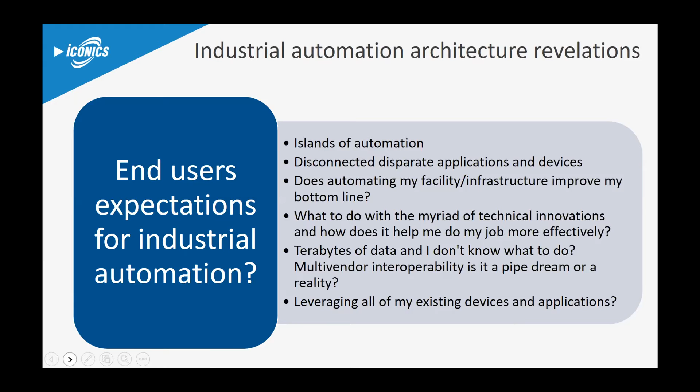As you think about this, beyond digital transformation, I think about manufacturing overall. We talk about Industry 4.0, and it's really important to understand where did Industry 4.0 come from. The first revolution was really the Industrial Revolution, which was focused on all the mechanical aspects. The second stage was trying to do a lot more automated things, thinking about assembly lines.

The third revolution was my favorite - the beginning parts of this is when we started thinking about programmable logic controllers, doing a level of automation in discrete and process through the ability to have an industrialized computer known as the PLC. The fourth revolution, which is the most important and has the largest momentum, is essentially what's going on with Industry 4.0, as well as all the regional equivalents of that.

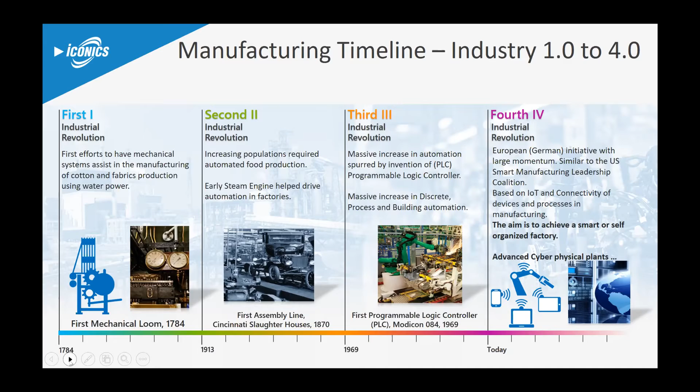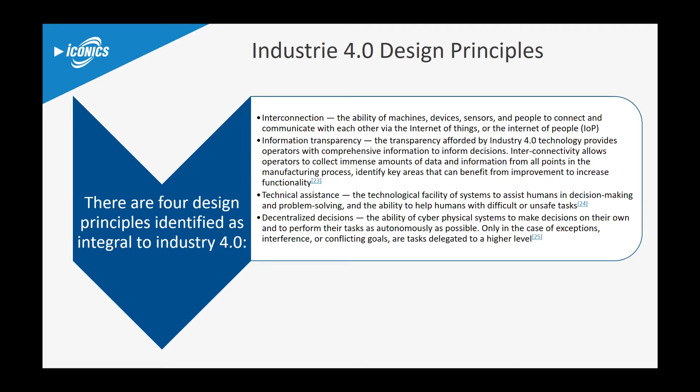The aim of Industry 4.0 and the whole industrial revolution is really to achieve a completely smart factory, a self-organized factory. If I look at Industry 4.0 and all the regional equivalents, there's basically 4 design principles that make up Industry 4.0: interconnectivity, information transparency, the ability to have technical assistance helping humans in decision-making and problem-solving processes, and at the same time decentralized decisions, allowing separate cyber-physical systems to make decisions on their own, achieving a significant level of automation as we approach full IT-OT convergence.

In the factories we've seen over the years, there's always been a wall between IT and OT. But now, IT really needs to get data from OT. And what we're seeing is the whole concept of focusing on what's known as IT to OT convergence - the ability to take data from OT and translate that data into useful information for the IT world.

There's a lot of different things that go on in the OT world - from a connection standpoint, gathering the necessary data from all the different devices and applications, and then being able to take that data, analyze it, and use all these great products out there to convert that data into what IT people understand to make useful decisions. The same is true that IT, after it makes those decisions, can actually push data back down into the OT world.

I'm pleased to have joined ICONICS to really focus on a lot of the things they've been doing, and how ICONICS has really been focused on delivering on this whole concept of the Internet of Things. They think about managing our devices - how do they manage those devices and how do they interact with the cloud? How do they leverage all that data, make it useful information, and ultimately get insights on that data to make better decisions and really realize the new business value that all this connectivity and data can give us.

One significant example I'm excited about is work we've done with a major oil corporation—unfortunately I can't say their name—where they leveraged all these different components using OPC UA technology. They were able to take ICONICS' respective IoT and HMI products, grab and consume this data, and push it up to Azure. This is a significant part of enabling them to have a complete automated process control system.

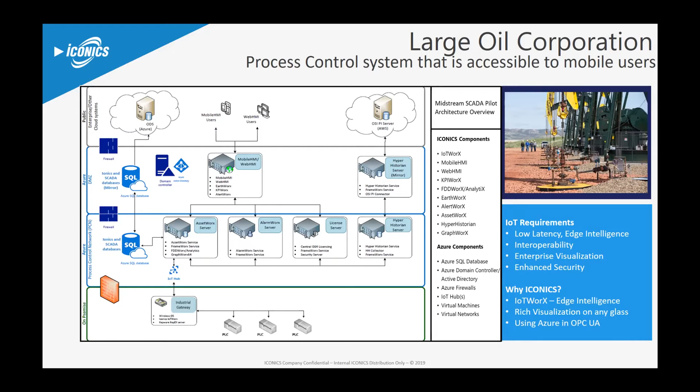Industrial automation spans a number of different industries. Another example is work we've done with Singapore, related to what we call the smart nation. They've started thinking about streamlining operations and achieving energy savings through central monitoring of all their assets with real-time visibility—again leveraging all these IoT components and taking advantage of digital transformation.

With that, I'd like to turn it over to Jim, who's going to go through a customer success story and provide a good example of how we've been using and deploying digital transformation with both Iconics and Mitsubishi-based products.

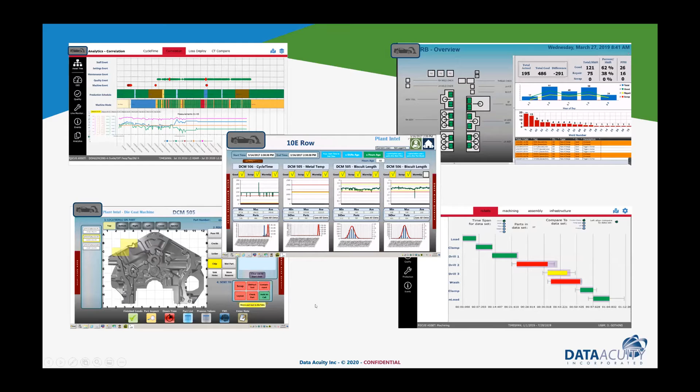These examples are all in the automotive industry, but we've applied the same data structure and data analytics across many different industries. So if you're not in automotive, this certainly applies across many different industries.

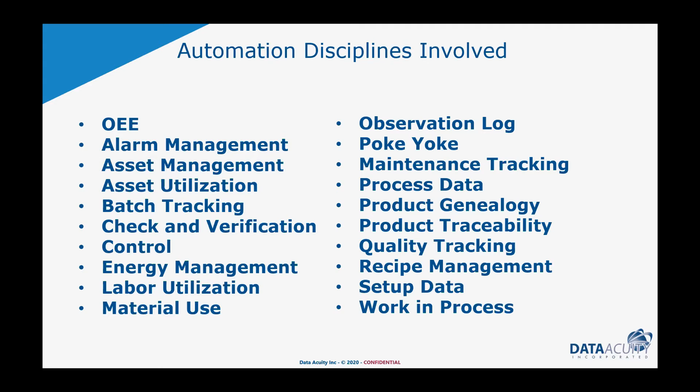The buzzwords manufacturing execution systems and the acronym MES tend to cover a lot of different automation disciplines. This includes OEE, or overall equipment effectiveness, alarm management, asset management, recipe management, product tracking, product genealogy, maintenance tracking, work in process, and labor utilization. All of this eventually gets pulled into these kinds of projects where we're analyzing data and looking for efficiency.

For today, we're really going to focus on just a handful of those automation disciplines. We're going to start with how we applied OEE, overall equipment effectiveness. Just about every project starts with OEE, and we come back to it quite often, because that's the tool set, the measurement that allows us to focus our resources where their greatest need is.

We're going to talk a little bit about taking data from things like control systems, material use systems, quality tracking systems, and maintenance tracking systems, and not just leaving it as data to be visualized, but bringing it all the way to things like predictive availability, predictive maintenance, predictive quality, predictive material handling, and predictive performance by taking data analytics and bringing it up to predictive awareness. We'll talk about how we did that in some of these projects.

Again, we'll start with OEE, overall equipment effectiveness. The concept and principles of how to apply OEE have been around for a long time. Most of you have probably looked at OEE at some depth. So OEE is availability, performance, and quality as a measurement of how efficient a given piece of equipment is.

Availability is defined as the operating time versus the downtime, and operating time happens to be not a 24-hour clock, but in fact the scheduled operating time. Performance is the speed or quantity of product versus the design rate of a piece of equipment. Again, design rate is a little subject to interpretation, and we'll talk about that in just a second.

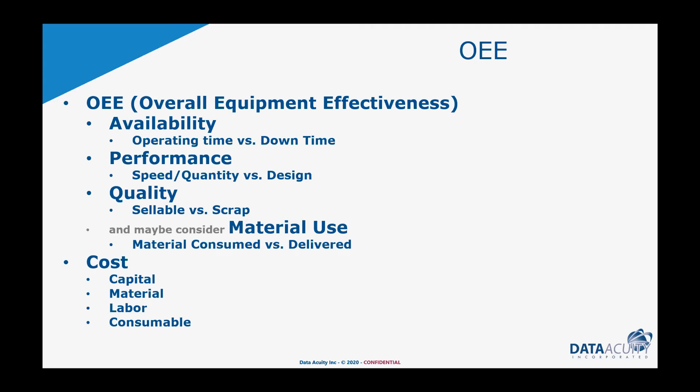If we're going to use OEE as a measurement to keep us focused on loss of efficiency, it's also important, in addition to keeping high efficiency, to keep low costs. So I can show you some ways of applying things like capital, material, labor, and consumable costs on top of the efficiency. We're not going to spend a lot of time on that today, but it can be worked into the equation.

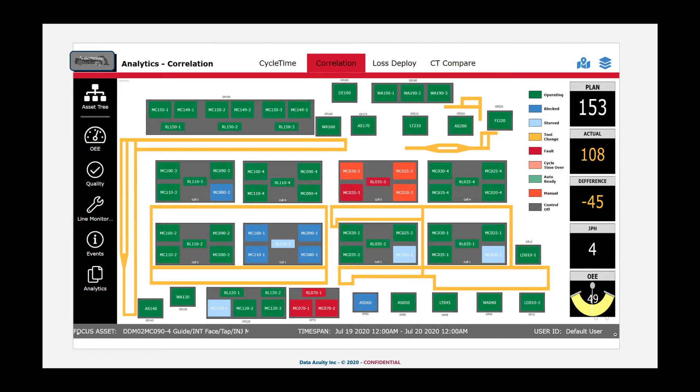So the point of OEE is to bring our attention to the areas of greatest need for efficiency gains immediately. If you throw a plant map up, OEE is changing the colors of assets or machining centers in a given plant, and our eyes immediately focus on the red machines. These are the machines running less efficiently than other machines, and we're scoring each individual machine.

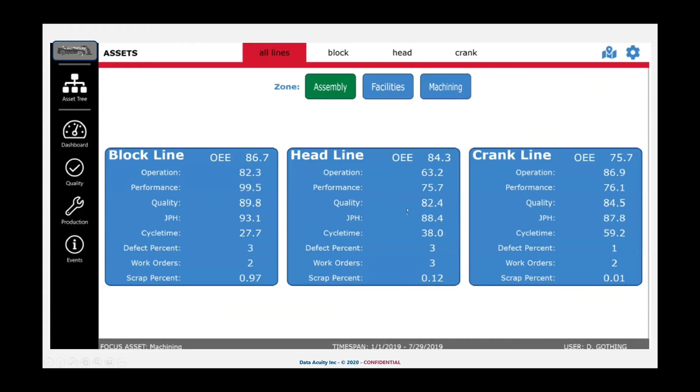The challenge with OEE, and again, OEE is a concept and a measurement that's been around for quite some time. The challenge that we've seen through experience is that quite often it leads to finger pointing within plants.

For example, I define availability as the scheduled operating time versus the downtime. Well, the question always comes up, who is it that determines what the scheduled time was? Production is going to tell you that during break, we shouldn't be scheduled to be running, so don't count that time against us. Maintenance is going to tell you that during preventative maintenance, changeovers, cleanouts, we shouldn't be counting that as scheduled operating time. Don't count that time against us.

Same thing happens on performance. Who is it that determined what the goal was? Here's the speed of the machine versus the ideal or the goal. Was the goal set by the OEM that built the equipment? Was the goal set by the engineering department that certified a set of parameters on that machine? Or was the goal set by the production manager who's taking into consideration things like break time?

And then the same thing will happen on quality. Who is it that determines what is scrap? If you take a part out for destructive testing, is that bad quality or was that a good part? It just can't be sold because it was used for destructive testing or for quality samples. So this often causes finger pointing within a plant. Is our OEE score good or bad because we decided to classify time as scheduled time versus unscheduled time?

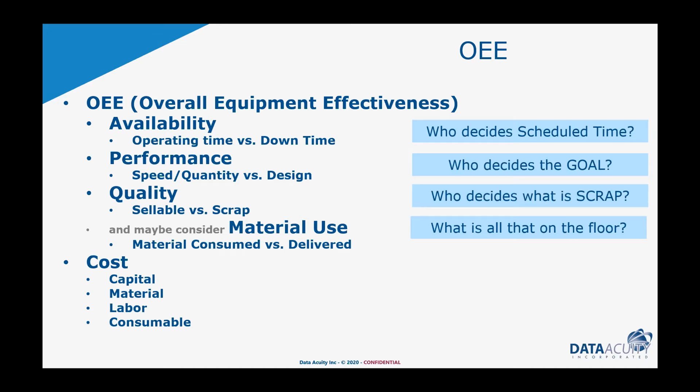What we recommend instead of a straight OEE formula is to use something called a loss deployment approach. And what a loss deployment approach does for us is it lets us take the lost opportunity to make a sellable product, and we use the data infrastructure within the tools that we talked about to build this, and actually come up with what was the true opportunity to make a product.

I could have made 1,000 parts today if I ran all the equipment at 100% and never ran out of material and always had an operator. And then we can take the amount of parts we didn't make. Well, I should have made 1,000, but I only made 800. So there's 200 parts that I'm going to deploy across the reasons I didn't make it.

Was it the machine's fault? Was it the process around the machine's fault? Was it because of a required task? Was it an intentional loss? And what I mean by that is machine's fault, well, that's traditional OEE measurement.

That's traditional OEE measurement. The process around the machine, those are the waiting fors. I was waiting for a technician. I was waiting for material. I was waiting for instructions.

Required tasks are things like preventative maintenance, clean out, changeover. Intentional losses are things like we're not scheduled to run on a Sunday, we don't have any customer orders.

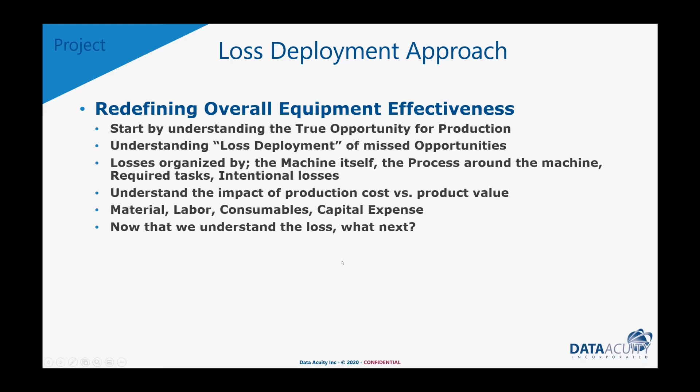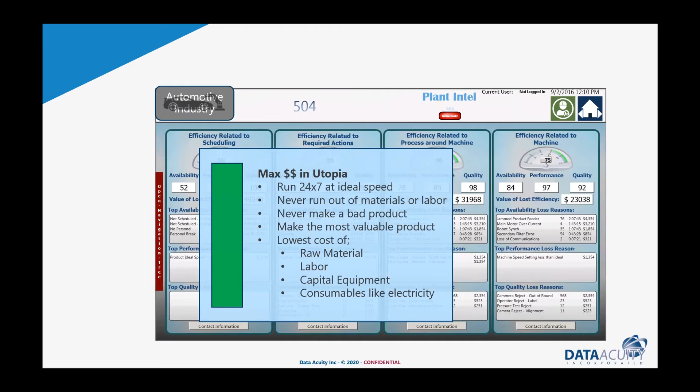So that allows us to take OEE, which is quality, performance, and availability, and instead start from the point of view of how much product could I have made today in Utopia. So 24/7, always have an operator, always have raw material, but I didn't make that much. I only made 800, not 1,000.

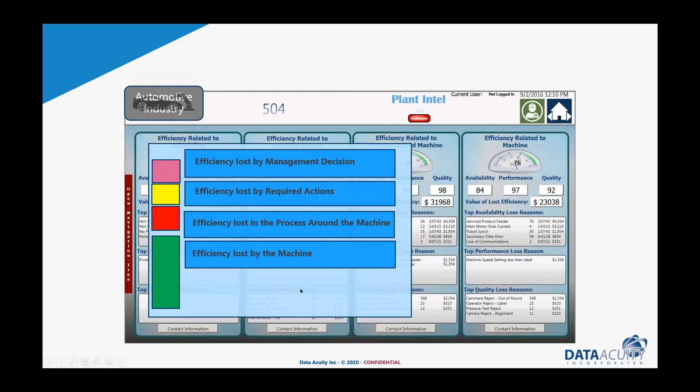So let's show that loss across areas like efficiency lost because of the machine, efficiency lost because of the process around the machine, efficiency lost because of required actions, or efficiency lost because of management. And it allows me to dollarize that, again using the data structure and the tools we've talked about here today. It allows me to assign a dollar value to how much money we actually lost because we didn't make sellable product because of the machine.

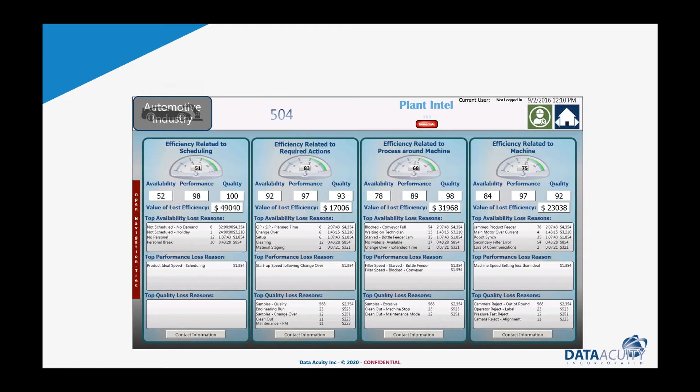How much money did we not make today because we didn't make sellable product because of the process, the waiting fors? So taking a loss deployment approach on the projects we're talking about today has helped us focus very specifically, not just on the machine efficiency, but on where are all of our losses of efficiency within the plant.

Here's a typical report that comes out every morning with the actual cost, dollar cost of not making a sellable product because of the following loss reasons. And this is going to keep us focused.

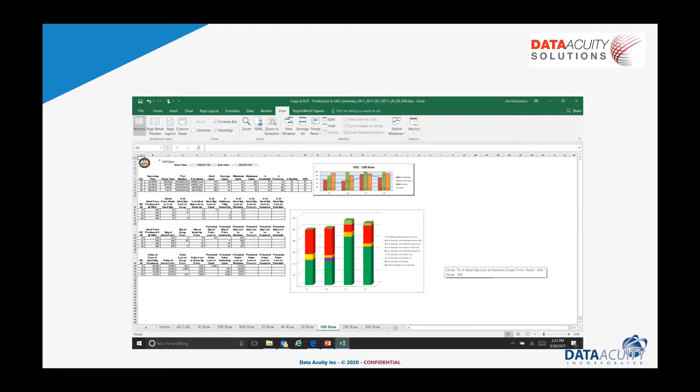Okay, so now we're going to move on — that's starting with OEE. We always come back to OEE, how do we keep focused? How do we keep our resources spending their time on the reasons why we're losing efficiency?

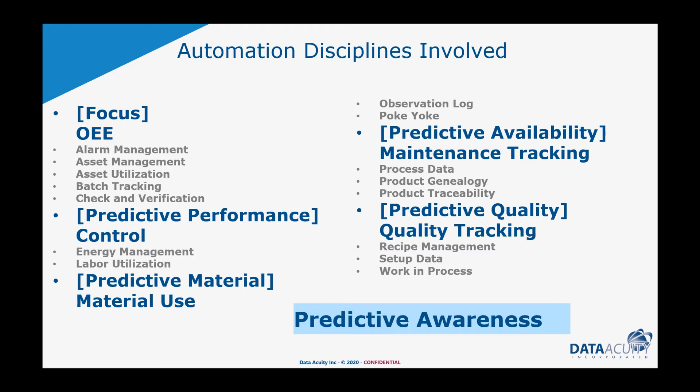Now let's drill into these four other examples of reaching for predictive awareness, not just the presentation of data, not just logging data, but actually using the data to predict where we are going because of the machine properties that are going on right now.

To do that, we're going to talk a little bit about this thing called a DIKW model. And this isn't new, this isn't something that Data Acuity came up with. I encourage you to look into the DIKW model a little bit.

But following along with the slides that Tom talked about, we start off today with very cost-effective collection and organization of data throughout our manufacturing plant.

Most plants today have ways of taking that data and correlating it so that it becomes information, not just data. If I take data that was collected and associate it with an asset or piece of equipment, it's now information. If I associate it with a serial number or batch number, it's now information. Associated with a time frame, a shift, a day, a week, it's now information, not just data.

So we want to build data structures using this tool set that allows us to associate the data to make it information. If we take that information and put it in a report, and apply some kind of sorting or analytics to it, it now becomes knowledge.

And that's where most plants are today. You get reports every morning that take the data associated with a given asset or piece of equipment, plotted on a chart, and it shows up in your inbox every morning as knowledge. This is knowledge of how specific equipment happens to be running.

What we want to reach towards, and what we've accomplished in the examples we're about to hit, is wisdom. That is, let's take that knowledge, those charts, those reports, and have either people look at them, or more importantly, have the system automatically tell us the kinds of things we should be doing to improve the performance and efficiency within our plant. So predictive intelligence is going to take the knowledge and turn it into wisdom.

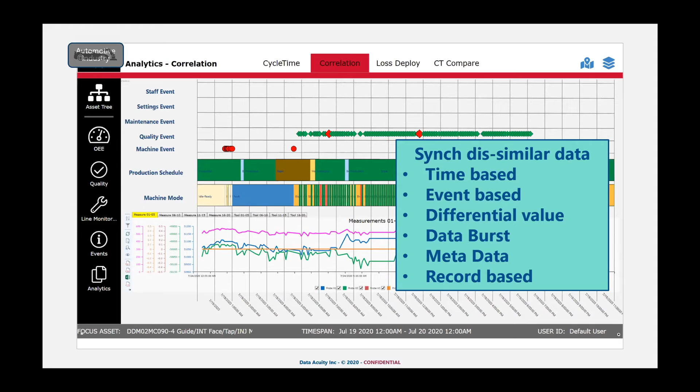So all of this needs to be synchronized into a single point in time so that we can correlate when this event happened on this particular machine, what led up to it and what followed after it, so that we now know how to predict when that event may potentially happen again.

So we talked a little bit about data collected from automation systems, from other databases, scheduling systems, CMMS, for example. Some of the data is coming out of operators' heads, technicians' heads.

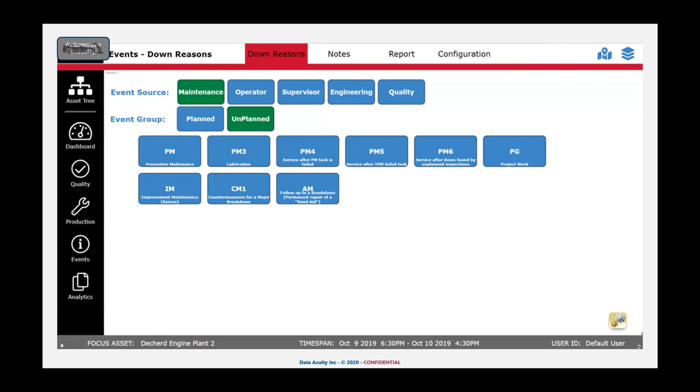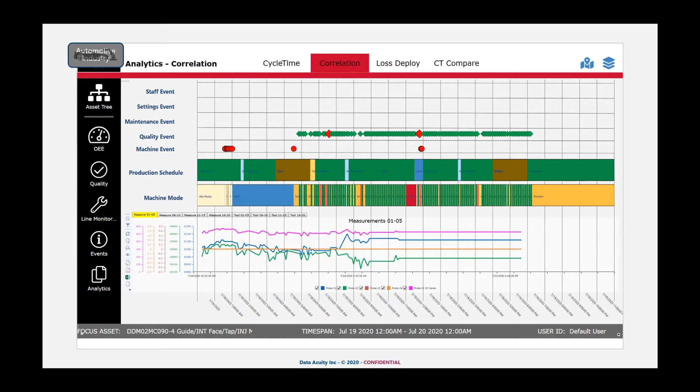So it's also important to figure out how do we build data structures where we can let people take what they've observed in their head and without having to think much, push 1, 2, 3 buttons and log for us an event that happened that gets correlated with everything else. When this event happens, we tend to see high torque on this particular motor. So those are examples of predictive maintenance by correlating dissimilar data using the tool set.

This is really good information for a control engineer and industrial engineer to learn, how is this machine really working, part by part by part.

Here's how it's working. What's even better is if I could take that set of data and compare it to another set of data. So what if I could take that part to part to part timing cycle and compare it to what was the ideal part running on this particular machine?

What if I ran part A instead of part B, the blue one instead of the red one? What if I looked at machine 7 instead of machine 8? How do they compare against each other?

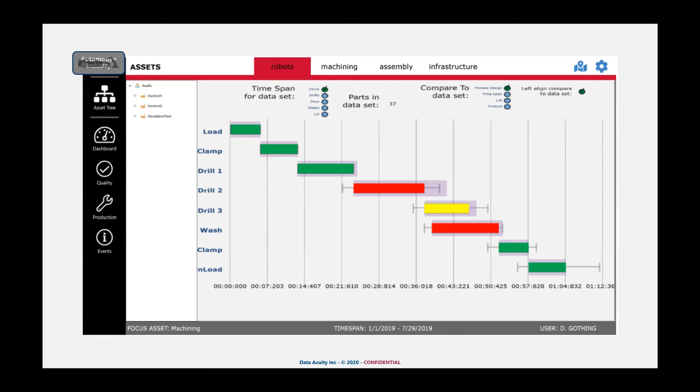The next example I'm going to go through is reaching for predictive quality. So trying to build data sets that are going to predict for us what will the resulting quality of a product be given the parameters.

So this example happens to be a metal frame for a seat, an automotive seat. And the challenge here is there's a whole host of welding robots that assemble this metal structure for a seat. We want to be able to predict when a given welding robot is starting to drift, when it needs a tip change, a changeover, or if it needs to be realigned. How can we predict that the quality of the product being manufactured might be affected because of the performance of a piece of equipment?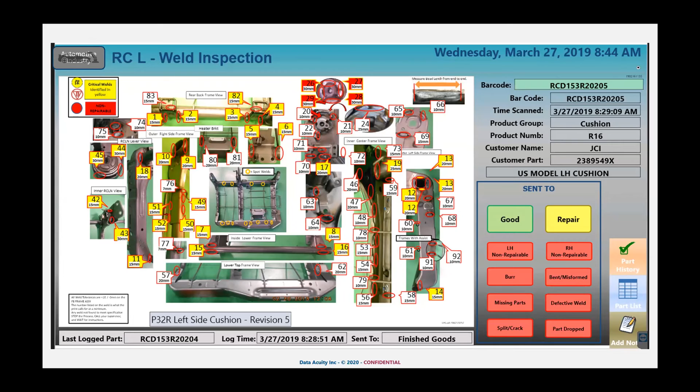The way we're doing that is a combination of operator observations, vision system observations, measurements that collect information about each and every weld on a given part in front of us right now. So we're correlating the design of the part, the information coming out of the vision system, what the operator observed by visually inspecting it, and coming up with information about which welds are drifting in the wrong direction, which are the good welds, which are the bad welds.

We can then correlate or align our bad weld and good weld information with when was the last time a tip was changed on the weld. What is the experience level of the operator working that particular line? What is the model number of the part that's running right now?

By correlating the Pareto chart of the worst acting welding robots with other events, maintenance records, experience level of operators, we can predict that if we don't do a tip change on a welding robot within a certain amount of time, we're going to start making bad product. If we don't educate operators with a little better training, we're going to start making bad product. So we're achieving predictive quality by analyzing the quality and correlating it with other sets of data.

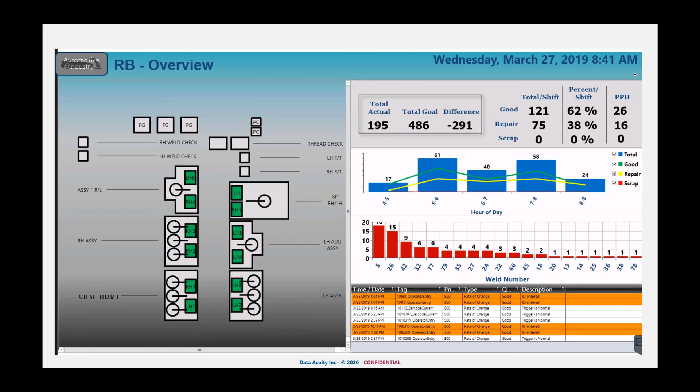In this particular case, a lot of the inspection is happening at a completely different plant from where the part was originally die cast. It's being inspected 2 or 3 days later, maybe a week later. So we're correlating the data that went with the actual quality problem over periods of weeks or days across multiple different plants in order to come up with an understanding of when that particular metal part was cast.

If we look at the metal temperature, if we look at the biscuit length, or maybe we look at the cycle time of the die closure, we can come up with predictions that when the metal temperature is X, we start to see the following quality problems in this particular area of the part. When the cycle time of the die closure is Y, we start to see a different kind of problem. We start to see a crack instead of porosity in a different part of the product.

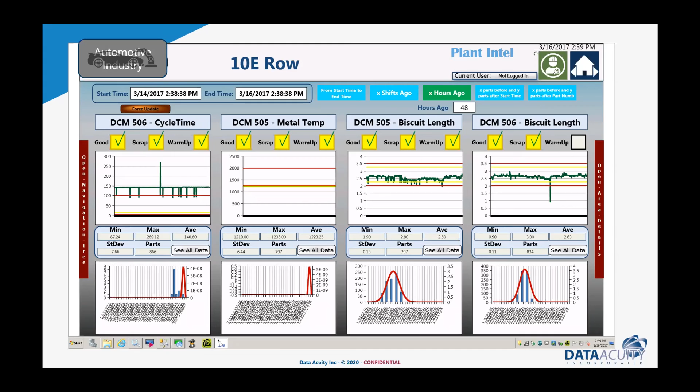So this allows us to predict quality problems by analyzing, when we see a quality problem, all of the data that led up to that part over weeks, over different plants. Let's look at all of that information and come to conclusions that when the following scenarios are in place, we're probably going to have cracks in a given part, a given area of the part.

We'll talk briefly about applying this concept to a very simple thing, material handling—both the delivery of raw material to manufacturing stations, and the removal of scrap material from different areas. By having knowledge of the efficiency of a piece of equipment, how many parts it's making, at what rate, and what's the schedule coming forward, and then comparing that with how often a fork truck brings new material to that particular line, how often it pulls away finished material, how often the scrap bin with the metal scrap fills up.

So we can compare activity of the material handling department—driving fork trucks, emptying bins, delivering raw material—to the actual production going on within the machines themselves, at what speed, with what quality level. And then we can start to schedule. Instead of having a fork truck just drive around the plant, we're going to tell it that it has to be at machine number 5 within the next 15 minutes.

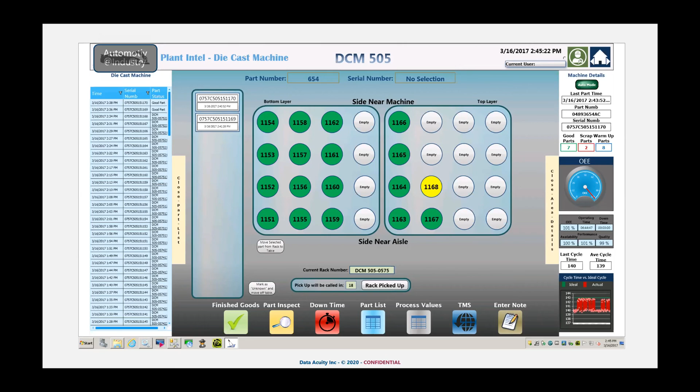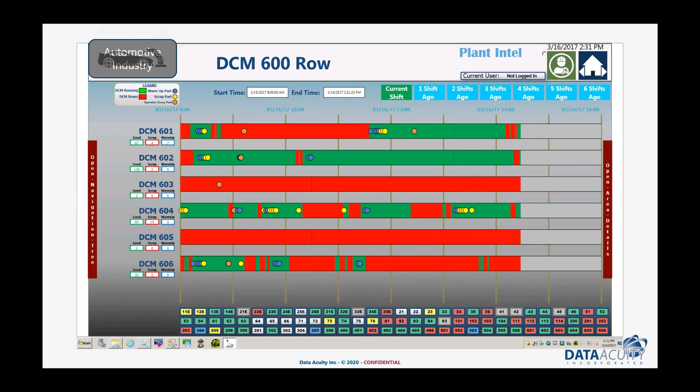It's going to drop off a bin to be filled up, and it's going to empty out the scrap metal bin. That allows us to look at multiple equipment and predict that we're going to have conflicts getting the right material to the right place at a specific time given the production schedule in front of us. So we're combining live real-time information on the performance of the machine together with records collected from the material handling department, together with production schedules, to predict where we're going to have conflicts in getting the right equipment to the right place on time to improve efficiency.

So I'm going to finish this with a couple of ideas on best practices for these kinds of projects. They typically start as very small, simple data collection and overall equipment effectiveness monitoring systems, but often grow to include lots of different disciplines of automation. We use the tool set Tom talked about because it allows us to start small and cost efficient, and grow to very complex, powerful data analytic systems.

I tend to recommend that people start from the top of the system and work down. As engineers, we like to solve each individual problem as it comes in front of us. We tend to think first about what the PLC is, how much I/O we have, what network it's on. I recommend we put all that aside and start from what data we're going to consume.

What do the screens look like? What do the reports look like? What analytics are we trying to get out of it? What predictive awareness are we trying to gain? Start at the very top, then work our way down to the network, the I/O, the touch points. It's hard for engineers to think that way because we want to solve problems at the bottom, but we want to start from the top, define the data consumption, define the predictive analytics, and then move down towards the I/O system second.